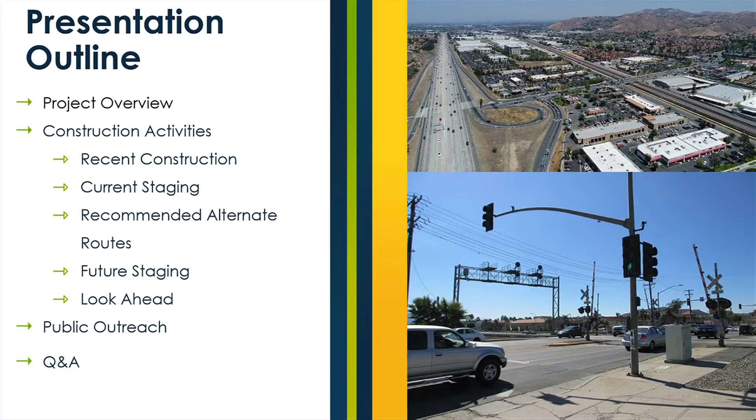In this view, you can see a good view of the steel network arch bridge looking westerly. It is a lightweight structure that can be built in a staging area and moved into place overnight, which we expect to occur later this year or early next year.

This is a great view looking southeasterly, where you can see some of the retaining walls. As you can see, they will have the dot pattern as previously presented.

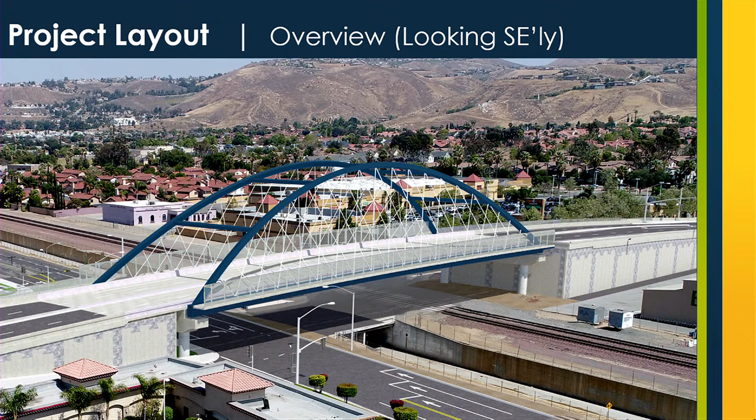Here is a good view looking northeasterly, where you can see the McKinley Street southbound side ramp connecting to Sampson Avenue. This is a good view looking southbound over the bridge and a good close-up look.

I'd like to turn it over to Josh Cosper with Mark Thomas to talk about funding and early construction activities. My apologies.

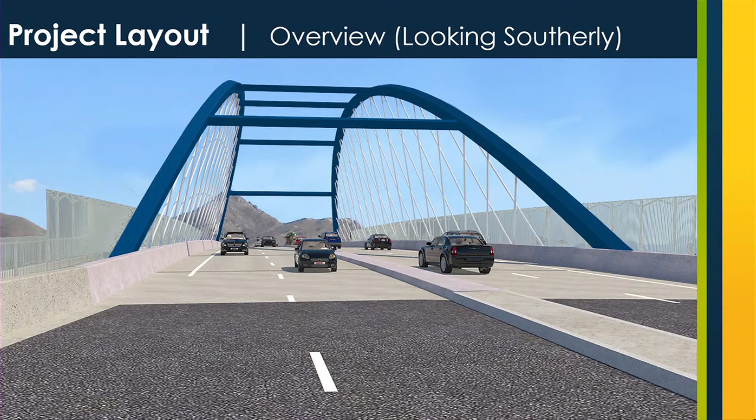Thanks, Savat. See if I can operate the mic and clicker at the same time.

So overall, the project is still on budget. We estimate the cost to be somewhere between 125 and 128 million, for which the city has approximately 129 million for the overall project.

We've been partnering with Walsh Construction, the actual contractor on the job, as well as Falcon Engineering, the construction management firm, to identify ways and means of how we can continuously save money. With some of the volatility in the market and availability of materials, it makes us have to be a little flexible and dynamic. Some of the things we've implemented are design modifications that avoid the need to replace this 12-foot wide box culvert storm drain structure north of Sampson Avenue.

Additionally, concrete, cement and other materials have increased in cost. Part of the original plan was to use a lightweight cellular concrete fill for much of the fill operations. In a lot of areas, we're finding that select fill, as it's available, is actually cheaper. So we've identified some means and methods there.

And then lastly, the tieback and the MSE walls that Savat talked about, that you see along the sides, we've made some modifications that have also saved a significant amount of money. We're going to continue to do this throughout the process, so as we identify cost savings, we're going to implement them.

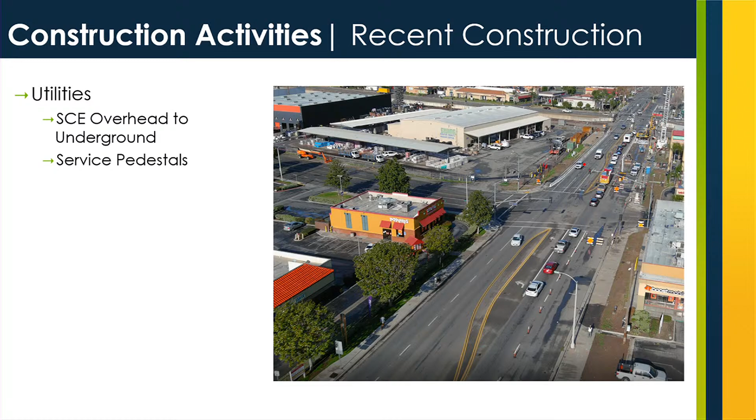Additionally, with the early traffic control out there now that we'd started in July of last year, it's been an ongoing effort of improvements, signing, striping, and safety measures we implemented in August. In September, we added video detection and other measures to try to improve circulation. It's a constant battle working with the contractor to make whatever modifications we can to keep things as safe and traffic circulating as possible.

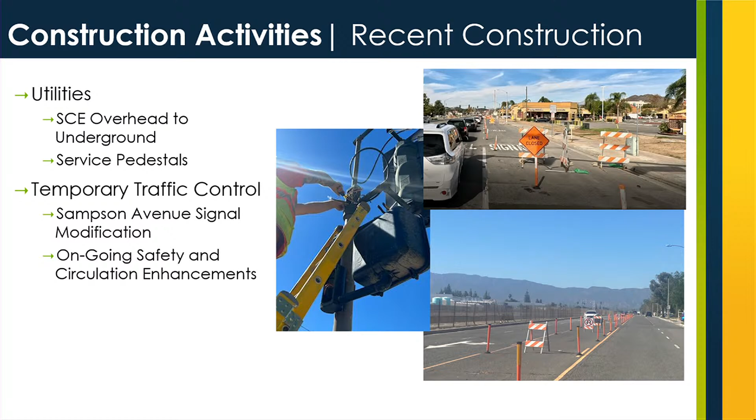So, the big exciting stuff you see out in the field, we were able to construct the easterly bridge piles. Off to the right of the screen, you see some of the drilling operations that have occurred. What happens is you drill 70, 80, 90-foot deep holes, 7-foot diameter, and then drop this steel casing in, as you see in this picture.

Afterwards, you see the rebar that actually goes in. This is a steel reinforcement cage that took cranes to lift and drop in. It was a pretty heavy-duty operation.

This was... wrong button. So this was actually a picture of the concrete being poured in as the steel cage, or steel casing, is being pulled out too. So it's quite an extensive effort.

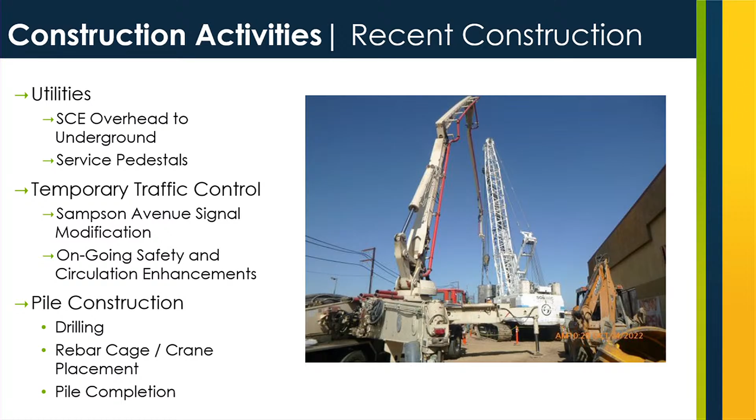And so we've gotten the easterly tube built with what's out there now. With that said, before we get into some other exciting parts, let's do a quick fly-through of a recent drone video.

There's some of the operations I was just talking about with the cranes that were out there.

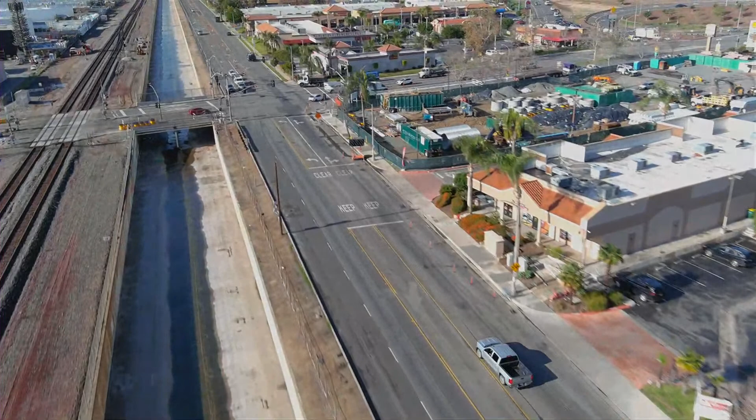So, part of why we wanted to show that, it obviously still looks a lot like it did before construction started. But as we move forward, we have drone videos flown every month. We have live, streaming videos happening out there. So you'll be able to see this, including time-lapse videos in the future when construction really starts to accelerate. Just wanted to show what we're going to present in future, and that'd be kind of some of the views you'll see.

The real stuff that you don't get to see here is what I'm going to show right now. What you're looking at along the top of the screen is a fabrication shop in Washington State where all the bridge steel is being built. And then the bottom pictures, the three pictures there, show really the backbone of the bridge — these are the steel tie girders that support the bottom of the bridge.

This is a nice side view. That highlighted yellow is that steel backbone, the tie girders that I was talking about. It's an extensive amount of work that's going on.

So here's some other bridge elements. Starting in the upper left-hand corner, the top two are the HSS braces, along with the bottom, which is the support diaphragm. This is really what gives the rigidity and flexibility of the bridge and holds it all together as one.

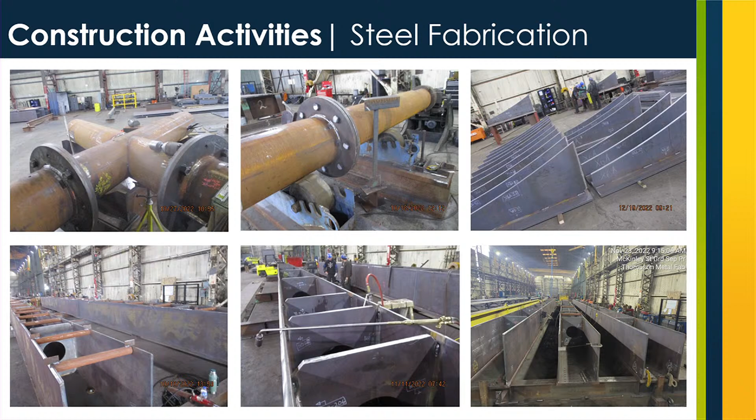In the upper right-hand corner, there's this sidewalk along the east side that actually overhangs off the side of the bridge as well. These are brackets that are being manufactured, and they're not little tiny brackets. They're like 8-10 foot long, substantially big steel brackets.

So I talked a little bit about the support diaphragm underneath. The picture to the right is a lot of what you see in a bird's eye view. And then really what I enjoy and am passionate about is at the left-hand corner - what's crazy about a bridge like this...

Those orange circular connections - those are some of what really holds the bridge together from a connection standpoint, as well as some of the brackets you see in the welds. We're talking tens of thousands of welds and connections along the bridge to make this happen.

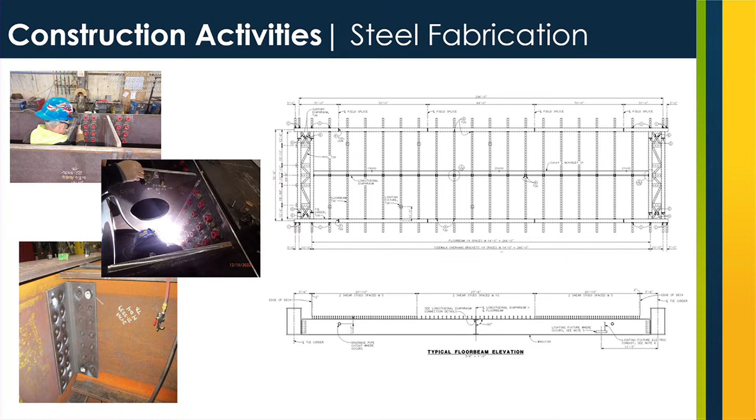And so quite a bit of this is happening off-site. We expect to see bridge parts coming relatively quickly into the staging area you see at the northeast corner of Sampson Magnolia, or Sampson and McKinley.

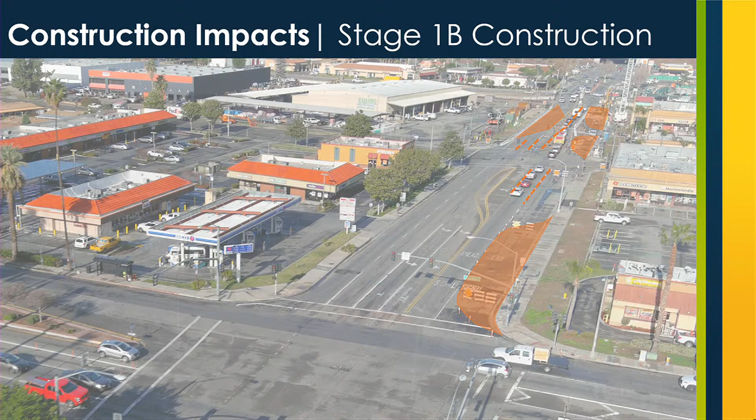Northbound traffic is going to have one lane from Sampson or Magnolia all the way to the 91. Any access to Estelle could be done through a dedicated left turn. Access to the Parliament floor building will have a right turn pocket, very similar to the signalized intersection that's out there now. The driveway between Donut Star and Lucky Greek will actually be temporarily reopened during this phase as well, and open to right turn movement.

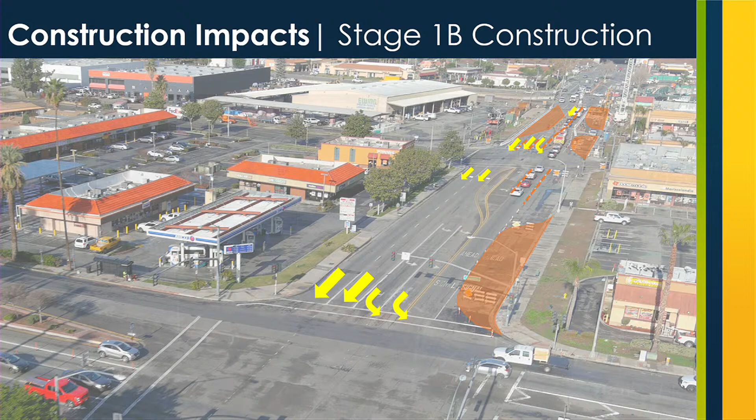And then southbound traffic will have one lane from the 91 to Estelle, where it opens up to 2 lanes. If you're going southbound, you can still access the Parliament floors via left turn, Estelle via right turn, and then Magnolia as existing with the dual rights.

As we get further to the north, this is a view of Sampson to the 91, with the 91 at the top of the screen, Sampson along the center, and McKinley running up the center of the screen as well. Again, the areas in orange are going to be restricted to traffic and our work areas.

Northbound traffic is generally going to have one lane until just south of the 91 freeway, where it'll open up to 2 lanes each direction. Access to Sampson could be done via right turn or a dedicated left turn.

Then southbound will similarly have one lane each direction. Any access to Sampson will be through a shared through left-right. It'll be designed and programmed such that when the railroad is crossing, through traffic will stop but still allow left and right turn if necessary.

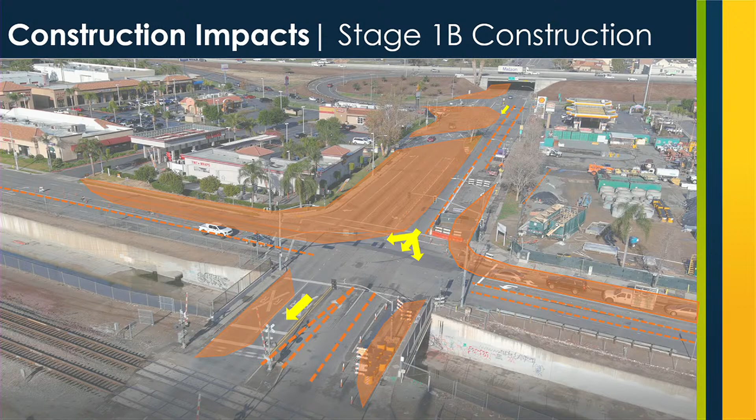The driveway between Carl's Jr. and the Quickies Car Wash will stay open as a dedicated right turn, as it is right now. Sampson itself will have one through lane each direction, very similar to what's out there now. And likewise, if you need to get onto McKinley southbound, you have a dedicated left turn.

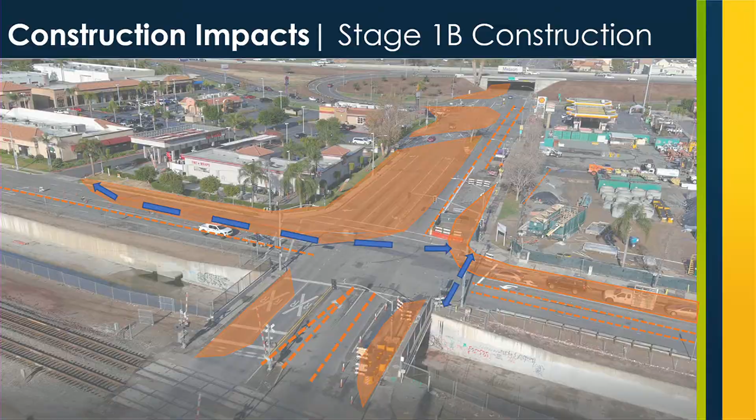So really, this is where you're going to see the westerly bridge piles and quite a bit of the retaining wall and fill start to go in over the next 3 to 6 months. We expect to implement this upcoming week, get the traffic signals cut over and all the cones and striping in place.

And then immediately after, we'll move into 2A. The big thing about 2A is that it involves a temporary closure to the Ewing McKinley intersection. So what does that look like? Well, McKinley's still going to maintain one through lane each direction.

Any traffic going eastbound right before the Ewing property will be redirected back to Grant Street. Darren's going to talk a little bit about the detour routes that we've been proposing and recommending throughout the project.

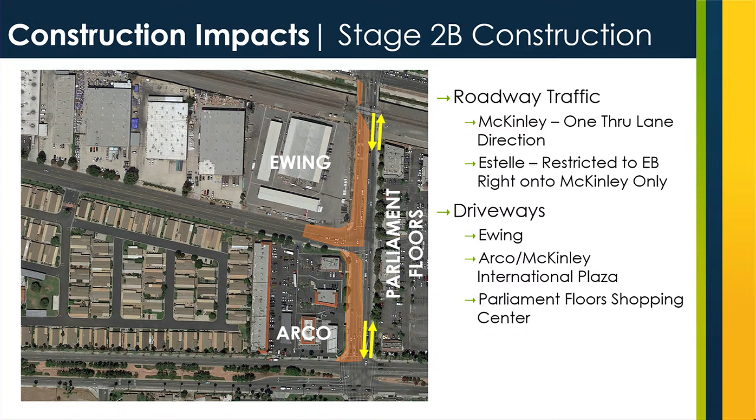Eastbound traffic will have a limited right turn opportunity to go southbound on McKinley from Estelle. McKinley will still have one through lane each direction.

Access-wise, Parliament floors and Ewing have the same access points we talked about previously. The main difference is Arco. While the Estelle driveway will be reopened at this point in time, the Arco driveway on McKinley will require some reconstruction there, but Magnolia will remain open as well.

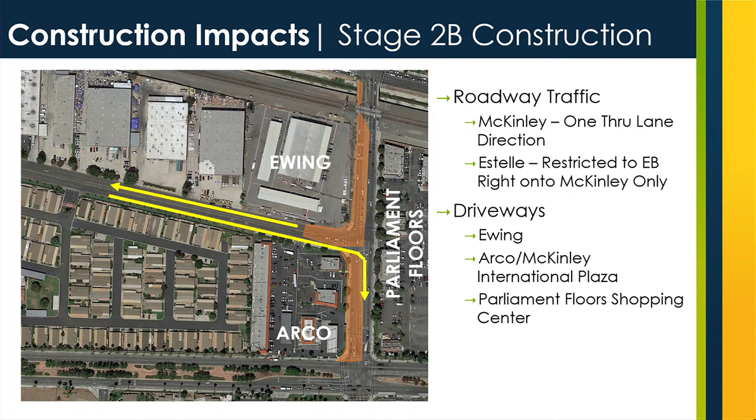With that said, I'm going to turn it over to Darren to talk a little bit about the detour plans. Thanks, Josh. So these slides with the detours have been presented in previous meetings. They're also on the city's project website, so I'll try to go through them rather quickly.

With all the construction activities, I wanted to talk a little bit about how best to get to and from the project site through these detours. If you're traveling to or from west of McKinley, we're recommending the following detour. If you're south of the railroad tracks, the best route will be to use Magnolia Avenue to connect to 6th Street and Promenade, or use I-15 to State Route 91 to McKinley.

To connect to Sampson, use Radio Road from 6th Street. If you're north of the railroad tracks, use Radio Road from Sampson Avenue to connect to 6th Street, or use Promenade from McKinley to connect to 6th Street. You can see here the local roads shown in the blue dash lines, and the freeways are the yellow lines.

Now if you're traveling to or from east of McKinley, we're recommending the following detour. If you're south of the railroad tracks, the best route would be to use Magnolia Avenue to connect to either State Route 91, Pierce, or Buchanan. If you're north of the railroad tracks, connect to Sampson Avenue from Buchanan.

If you're traveling to or from north or south of McKinley, we recommend the following detour. If you're south of the railroad tracks, I-15 can either connect you to Hidden Valley Parkway, to McKinley Street, to Promenade, to Magnolia Avenue, coming to or from north of the project. I-15 can also connect you directly to Magnolia from the south.

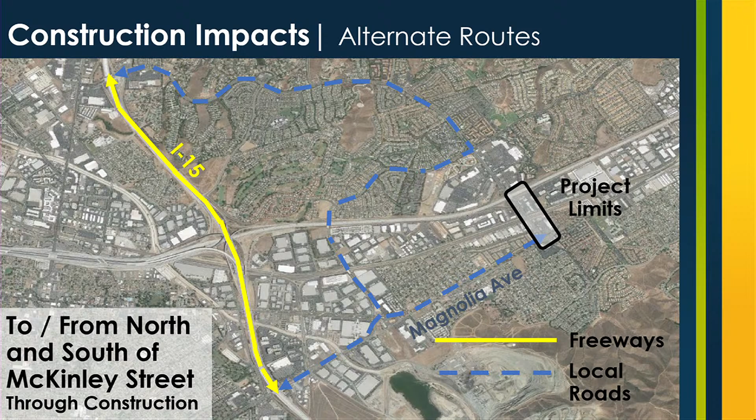If you're north of the railroad tracks, connect to Sampson through Melissa Court and Mariah Circle, connect to Magnolia from Sampson to Radio to 6th Street.

Lastly, those of you on Estelle, we recommend using Grant Street as your primary connection from Magnolia, as Josh discussed previously. During the temporary closure, traffic will be directed back to Grant Street going eastbound on Estelle before the Magnolia intersection. Afterward, McKinley will be generally open to Estelle during construction.

If you're south of the railroad tracks, I-15 can either connect you to Hidden Valley Parkway, to McKinley, to Promenade, to Magnolia, coming to or from north and south of the project, and I-15 can connect you directly to Magnolia from the south. If you're north of the railroad tracks, get to Magnolia from Promenade, I-15, or SR 91 as we previously discussed.

It's generally recommended that truck traffic not use McKinley during these phases of work, because turning movements are going to be restricted for trucks at the intersections of McKinley and Sampson.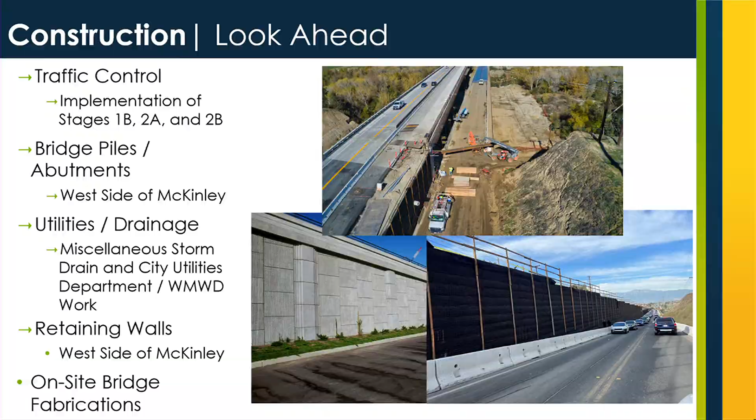So now, what will you see constructed over the next 3 to 6 months? It'll start with implementation of the traffic control stages that we discussed earlier. We'll finish the westerly piles and the bridge foundation work. We'll install a city domestic water line with water effluent line and drainage improvements.

With the amount of fill, you will see temporary retaining walls installed. You can see here some samples of what they'll look like in the top and lower right-hand side of the screen.

These are images from a similar traffic control and construction operation that's over at Hamner Avenue, and it's going on right now over the Santa Ana River in Norco.

These phases will end with permanent retaining walls along the west side of McKinley, and look similar to what you see in the lower left-hand corner.

And then lastly, as we get closer to a bridge move later in the year, we should start to see bridge steel components shipped to the project site, where it will be fabricated on site.

So now I'm going to turn it over to Ashley, and she's going to discuss the ongoing support that the city is providing to the local businesses in the area. Ashley?

Thank you so much, Darren. Good evening, everyone. My name is Ashley Zaragoza, and I'm an Economic Development Administrator focusing on business retention and expansion for the City of Corona Economic Development Department.

I'm here today to discuss the various business resources available to you at no cost. We've previously connected with the business community here, keeping you up to date with different resources. We connected at the last project meeting in spring of 2022, and continued different types of phone calls, in-person visits, and emails. Last we spoke was fall 2022, and of course now today. Thank you for those that have already connected with us, and we hope that after this presentation you're further encouraged to reach out to us so we can support you.